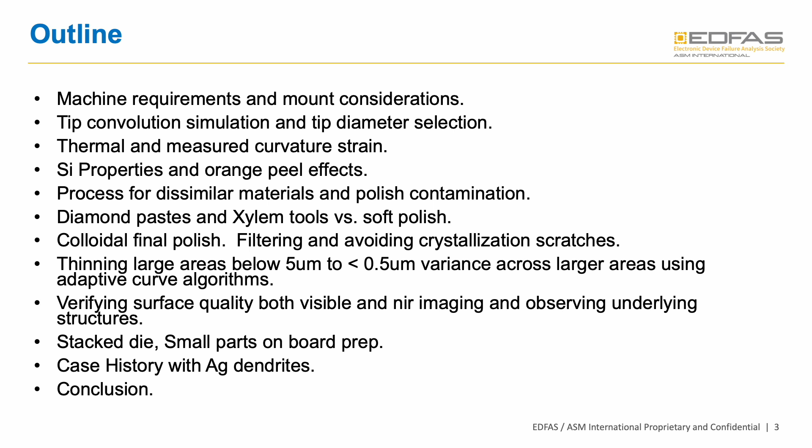So the first thing we're going to cover are machine requirements. We're going to overview the modules and the mounting methods. The first thing I want to talk about on the machine is how to fit large boards on.

There's an open design where you can place a rather large motherboard in the machine, and you just need to be aware of this Ymax value. This is 7.5 inches to the back mast of the machine. The device can be processed from beginning to end.

So you can have it on the board, you can do the thinning, you can do the inspection, you can do the polishing, all of that including the RST measurements without removing it. This allows us to get the submicron precision out of the machine.

The endpoints can be based on time, position, force, or capacitance and resistance functions, which we'll be going over in the next few slides.

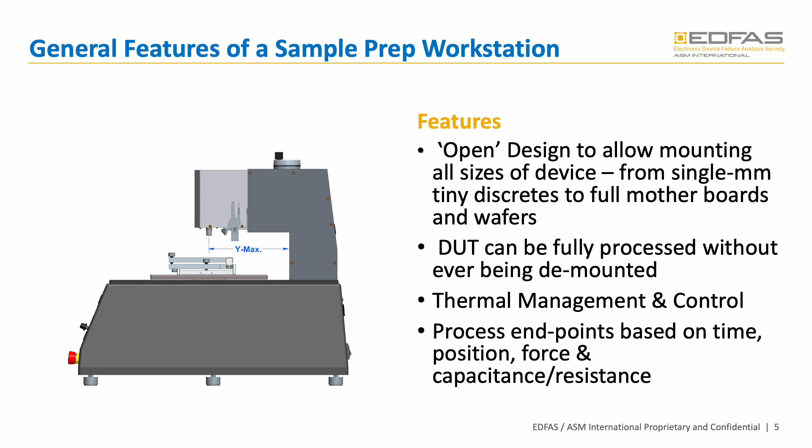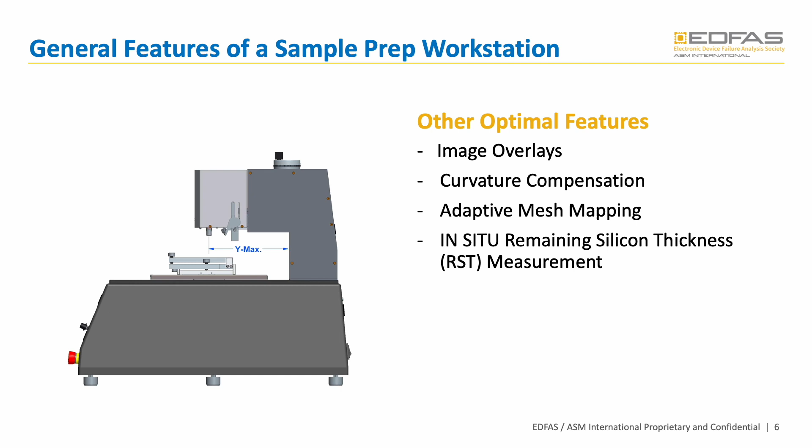Some other features: image overlays, curvature compensation, adaptive mesh mapping, and in situ remaining silicon thickness. As I mentioned earlier, by being able to leave the part on the machine, we can do the RST measurements. So by combining mapping and polishing, this is what makes the high resolution control possible.

So you start out with a curvature mapping model. This is an R-squared model where you're actually defining a curve and forcing that curve on the part. This is based on thinning the part, measuring the RST thickness variations from center to edge, and then matching a curve based on the tip diameter.

Once that curve's established or surface is established, then you add in the mesh map, and after you've added in the mesh map taken from the interferometer and you define that surface, then you use something called surf.

So what surf is doing, it's a surfacing control. It takes out the error in the force sensor so that you have a very deterministic Z head as the part is contouring the surface. So by combining these functions, we can get submicron accuracy out of the machine.

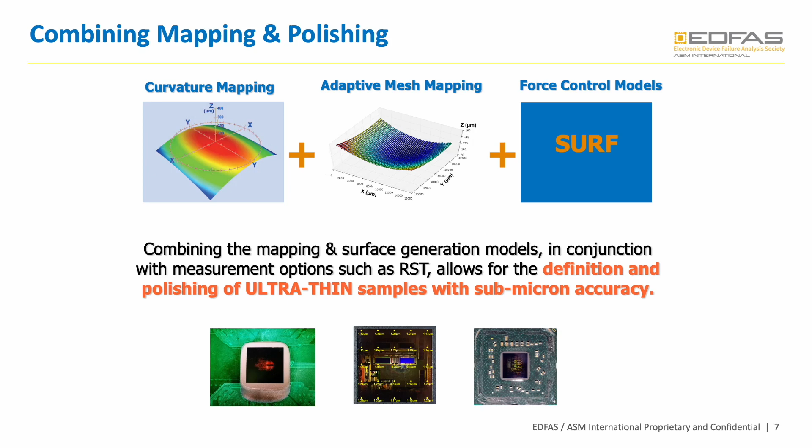There's also image overlays. This is if you want to target a particular area. You can load in diagrams, x-rays, or even an image of the same part or similar part that's been prepped previously to use as an overlay.

So the endpoint I alluded to earlier, the way this works is you have the tip biased with a 3.3 volt high impedance pulse, and then you have the lower plate which is tied to a high impedance amplifier. So we're sensing the pulse through conductive or semiconductive water.

Because the water is contaminated when you're thinning, it's automatically going to be slightly conductive. So as that water plate approaches the die, the capacitance increases, and then once it reaches any one of the bonds, which you can see over here on the right side, once it hits these bonds in this area, then you're going to get an endpoint response.

So you can set the machine to trip based on that endpoint response to make the process somewhat automatic.

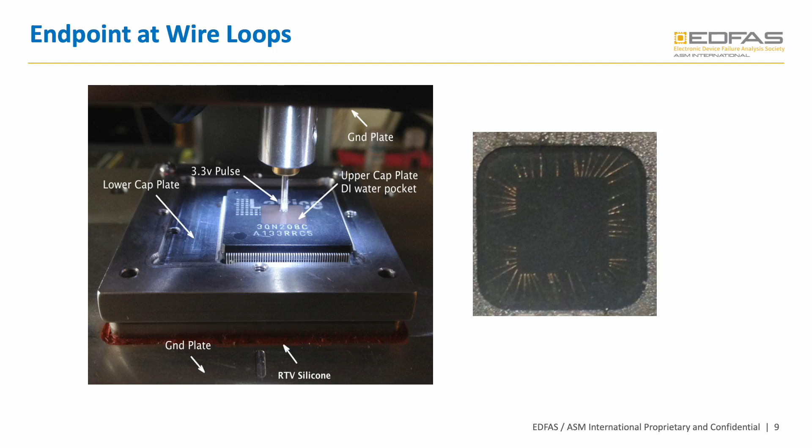So let's talk about mount considerations. It's very important to make sure that the sample's properly mounted. So when you place a sample here, you want to be sure that it's secure.

It could be nylon screws, it could be a hot melt wax, and you also want the part to be aligned so it's squared up to the machine.

What about boards? If you have very large motherboards, this board is so large, but the part we're going to be thinning is offset from the center, so it still meets the tolerance from the DUT stage to the back mast of the machine.

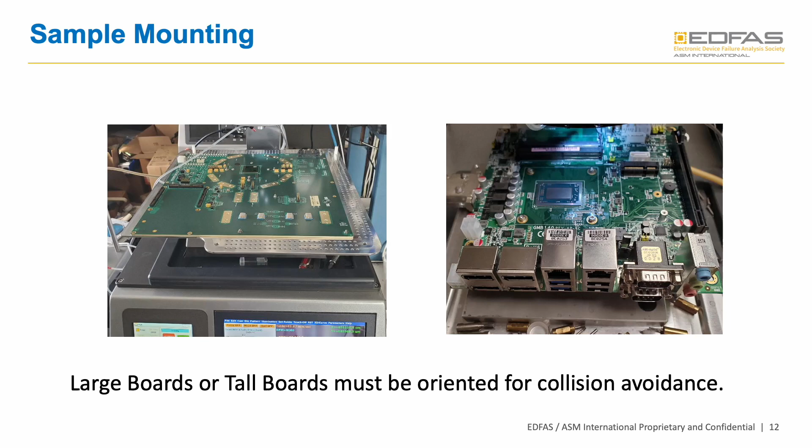With 2.5D and 3D die, you have to be concerned with, when you have multiple chips, are they all the same thickness? They typically vary by 5 to 10 micrometers in thickness, so be aware of that when thinning, as to which one is your target die and whether it will be thinner or thicker than the die you're not interested in.

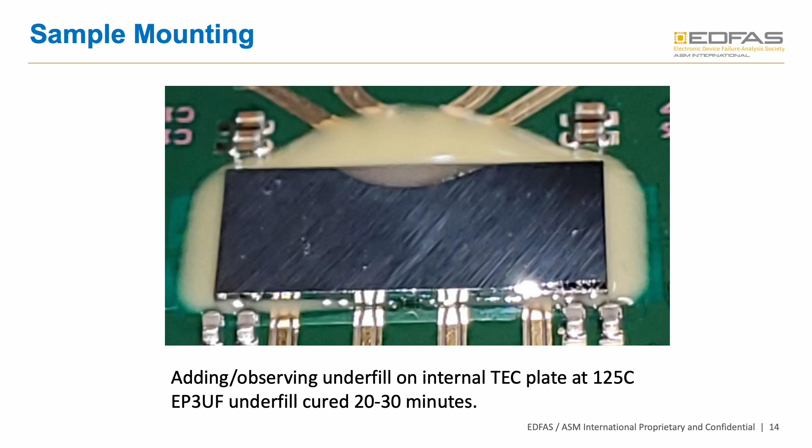What about underfill? In this case, the customer wanted me to thin this die, but there was no underfill. So I added underfill using the little internal thermoelectric plate on the machine, so I could observe the underfill creep underneath the die. I used an EP3UF underfill, which cured in about 20 to 30 minutes.

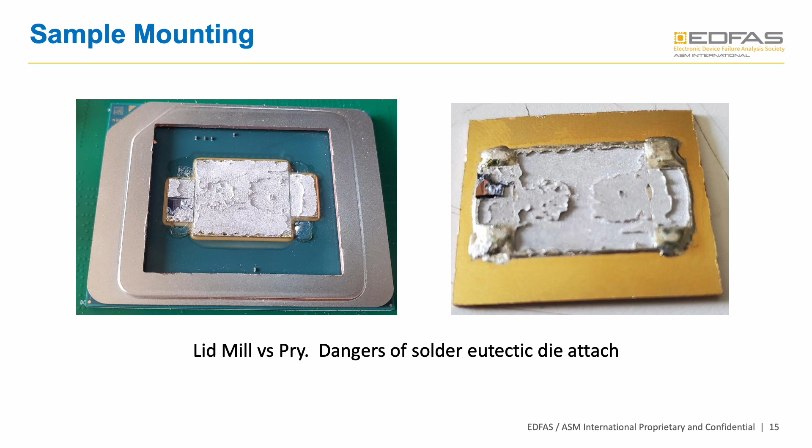Let's talk about tip convolution simulation and tip diameter selection. With tip convolution, the diameter of your tip versus the surface it's going to run on matters — the bigger the diameter of the tip, the more trouble it's going to have covering the surface properly, even if you're riding on this edge of the tip.

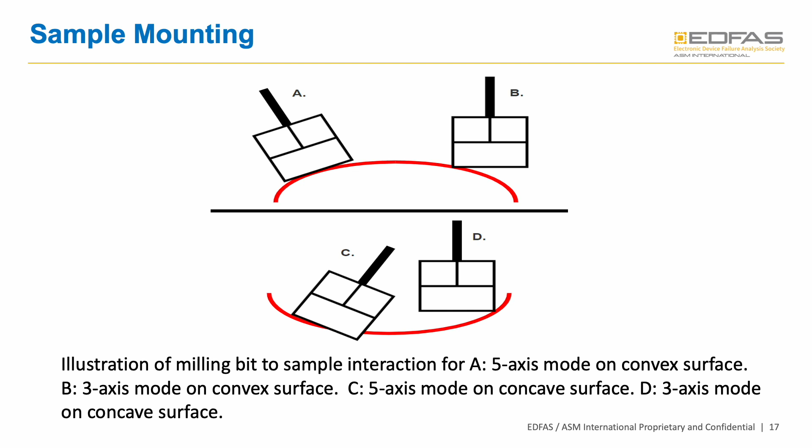By doing this, you can simulate and play with different tool diameters, and predict what your results are going to be before you remove any silicon.

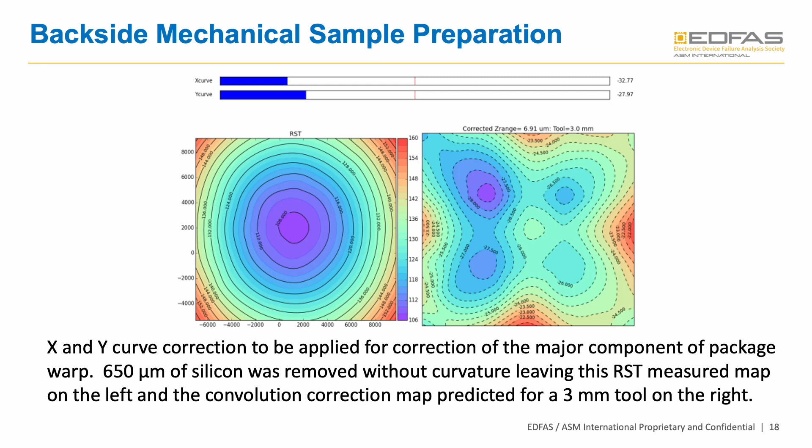Now, how about the change in curvature of the part? As you're thinning these down, while you're removing layers of silicon, the wafer curvature is actually changing — so this is a dynamic event. The best approach is to go ahead and do what I call flat topping the part.

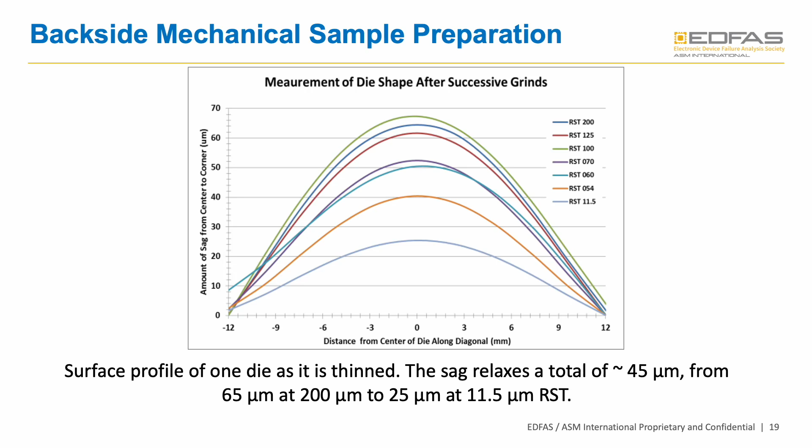You remove the silicon and don't worry about the curve, you just flat top it. Take it down to about 100 like that previous curve showed, or even 50 if you're going to go to 20 or 30 microns or less. So you thin it down, and that gets rid of most of this relaxation. Then from that point forward, you just do the curve plus mesh models and let the machine iteratively correct the smaller changes in the curvature of the part.

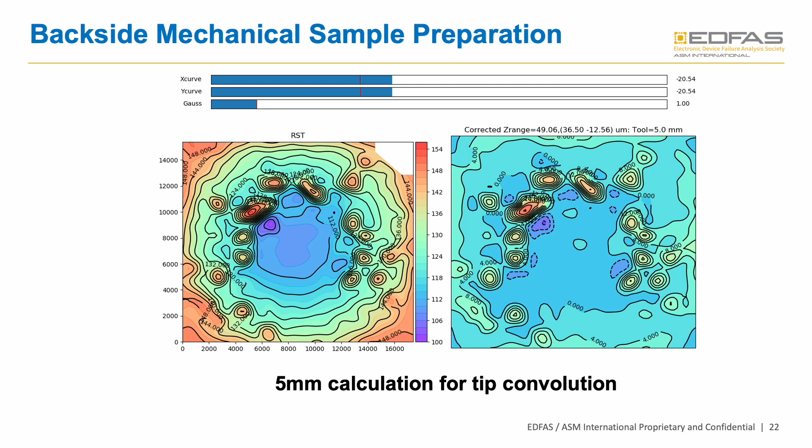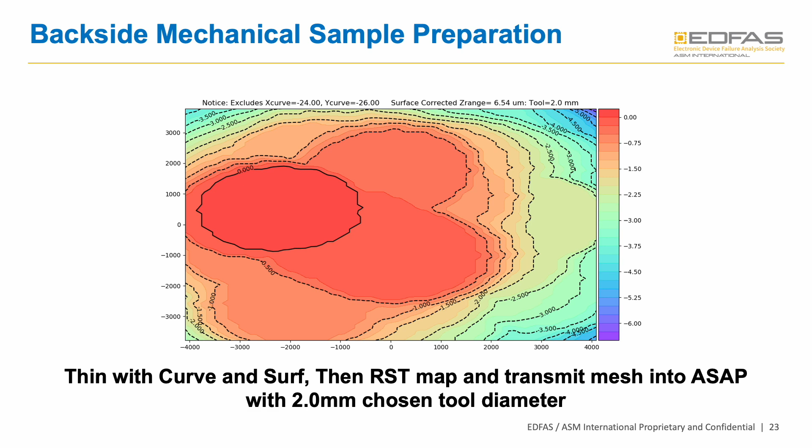Once that's established and you've removed a small amount of silicon to create that curved surface, you measure that surface and transmit that mesh model into the machine. Now you're taking the curve you've already created and adding this RST mesh model. With these two running together, you're greatly reducing the errors in the surface based on the irregularities of the part versus the theoretical curve you're trying to use.

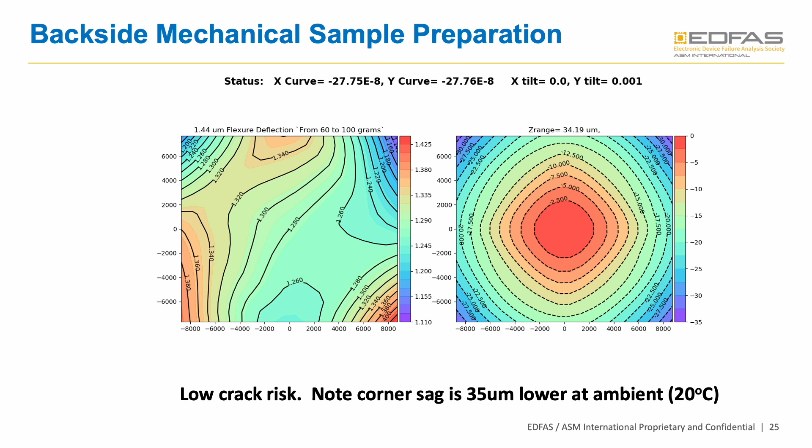Now if we heat this part up just to show how much it relaxes, you can see we're in the minus 27s, and the edges are about 35 microns deeper than the center. If we heat the same part and do another drop-down profile measurement on the machine, we find those edges are now only about 12 deeper than the center. So it's changed quite a bit from what it was previously.

And you see the X and Y curves are now minus 7s, minus 9s, so much less curvature. Remember that chart you saw earlier where as you thin it, the part relaxes and changes. So as you're heating and thinning this part down, once you get below, say, 100, the curvature is going to relax typically on the part enough that you no longer need thermal. So typically you want to do the thermal, thin the bulk of the material off, turn the thermal off, remove a small amount more material with an extra fine diamond tool, then do your RST mapping and go from there.

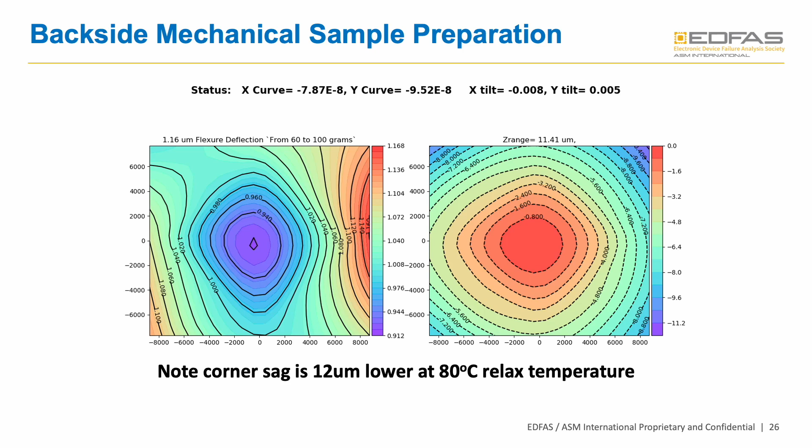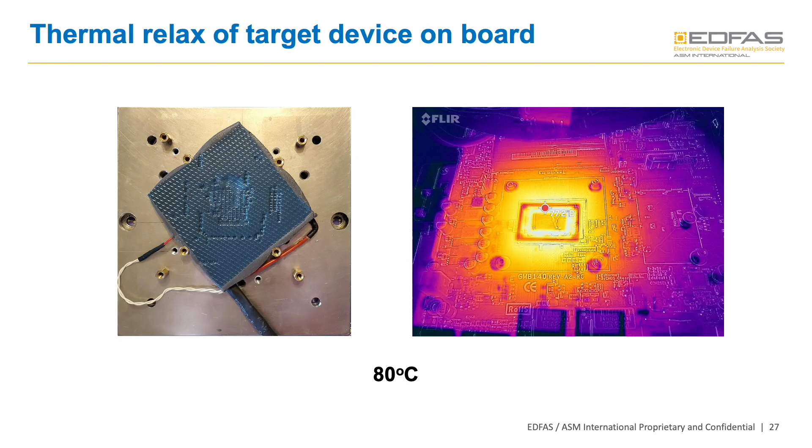So what about a large board? This is a Peltier placed underneath the board with a thermal pad material, and on the image on the right, this is an IR image of the actual heated part at 80 degrees C, showing we're getting the uniform temperature we want on the part for the thermal relax. Again, once this part has been globally thinned and we're below 100, we can turn the heat off and proceed normally from there.

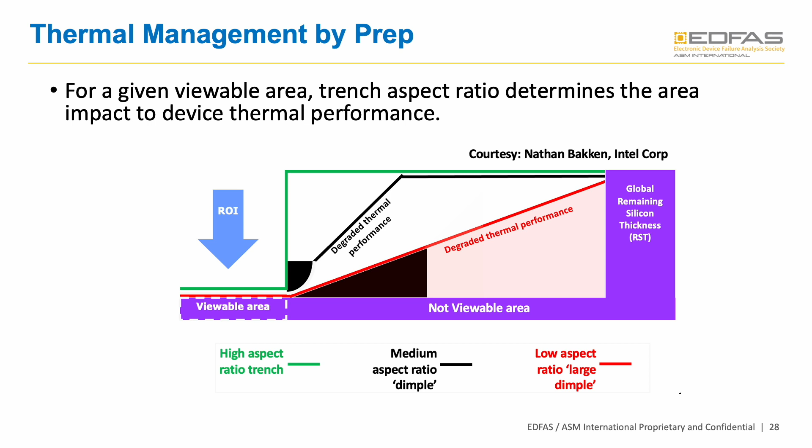Well, what about thermal management when it has to do with the part itself dissipating power? In that case, what you want to try to do is limit your viewable area where you must thin, and leave the silicon thick in the other areas where you've got a great deal of heat generation. Because once you thin the part, you no longer have any lateral ability to dissipate the heat.

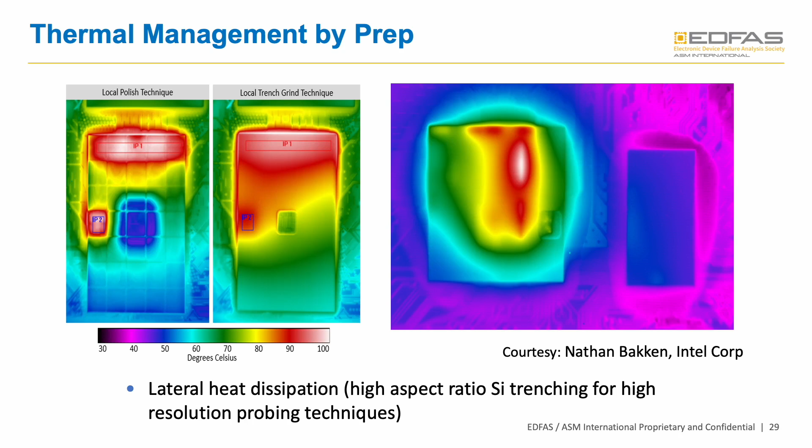So if we look at a local polishing technique versus this trenching technique, you can see this area is red to white, which is hotter, and it's a little bit cooler here. What you're trying to do is set this up where only the trench area is where you're going to actually be taking your measurements, leaving the silicon thicker in the other areas to do a better job of heat dissipation. So with power devices, this is something you've got to keep in mind.

Now what about the properties of silicon in terms of its translucency, and how it responds when you go ultra thin? Here we have the Lambert-Beer absorption law, where a light of intensity I0 incident on a piece of bulk silicon is attenuated based on the thickness of the silicon as a function of its wavelength and doping concentration.

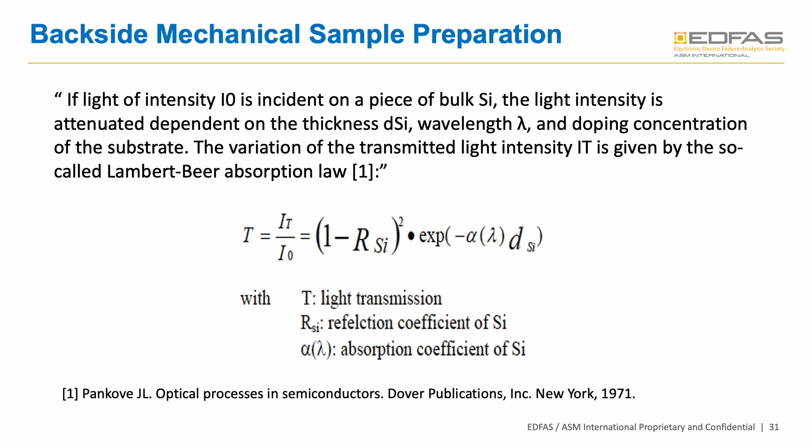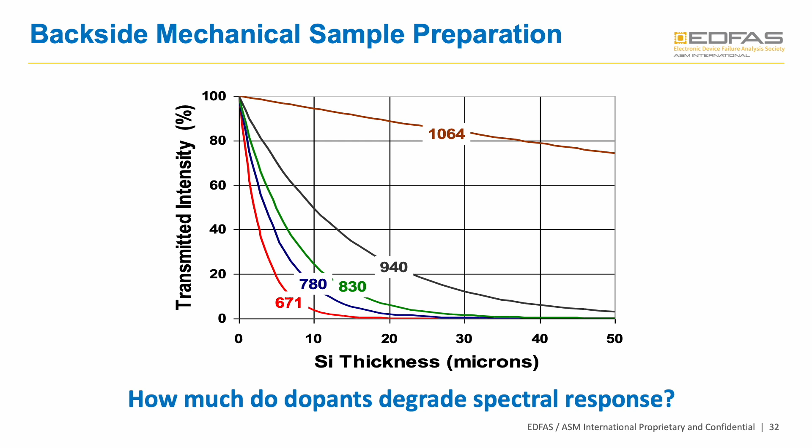So if we take a look at the next slide, this is how that affects a lightly to undoped piece of silicon. You can see the 1064 nanometers gets through fairly well. But as we head to the red wavelengths, the 671, we're now below 10 microns to even get through. So we really want to be at about 5 microns, 3 microns kind of thickness. And that's the interest in being able to do the visible SIL lenses, to get into the visible domain so that we can resolve smaller devices.

Now, what does doping do to this? If we look at the dopant concentration, you can see that your transmission falls off even at the band gap. We're looking at about maybe 8% with the heavily doped silicon, versus a lightly doped, which is going to be around 60% or so. As you go to longer wavelengths of IR, the dopant attenuates even more heavily the image you're going to get. So this is a challenge for the interferometer if you're looking through thick silicon, because the dopant concentrations are going to limit what you can pick up. So you'll have to thin some and then measure.

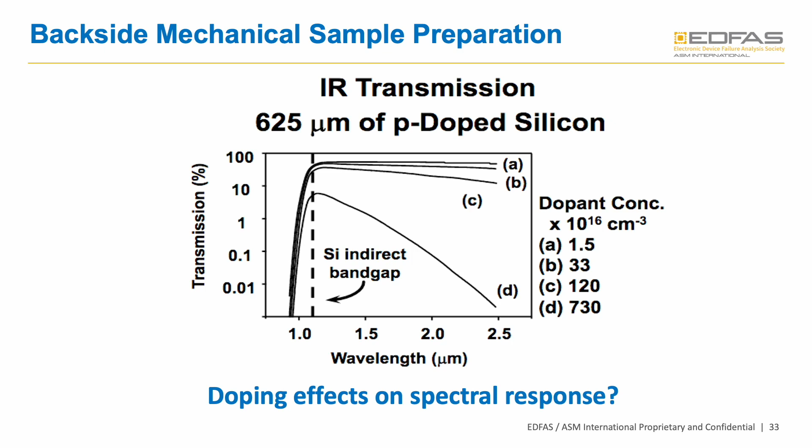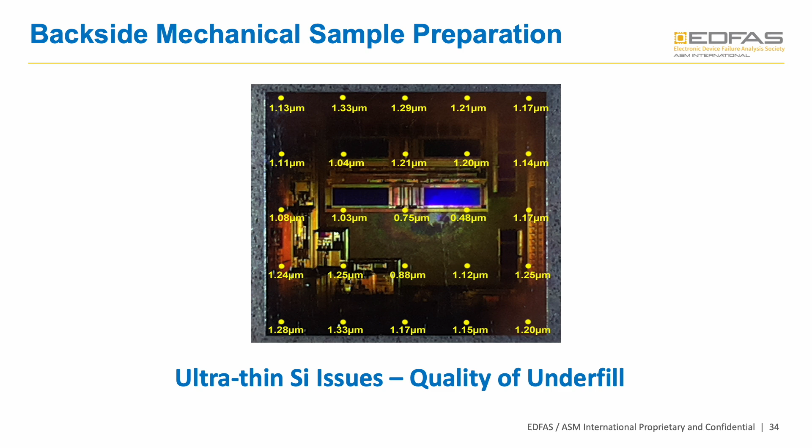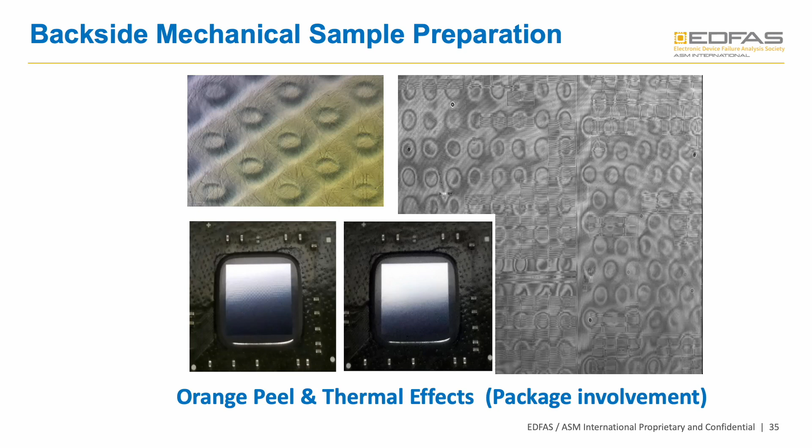With ultra-thin silicon, what are the issues? When you go really, really thin, it's not a matter of whether the machine will do it, it's a matter of whether the part can withstand it. The quality of your underfill, the type of strains on the part, all factor into this. If you look at this part that's been thinned down ultra thin, you can see on this side where all the bumps are, putting strain on the silicon. The silicon acts like saran wrap, and in a laser interference mapping you can see the irregularities of the fringe patterns, the moire patterns around each of these bumps. If you cool the part down, you'll see the bumps appear. If you take the part to the temperature at which you prepped it, you'll see the bumps disappear. Obviously you wouldn't want to reflow a part when it's this thin—it's unlikely that it would survive.

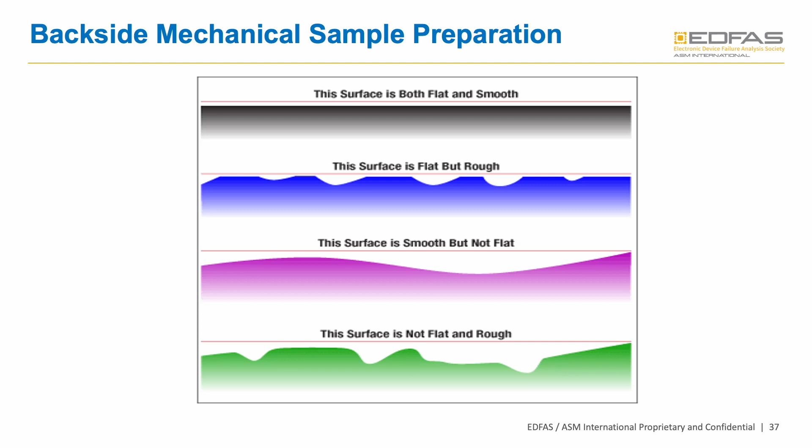So what about dissimilar materials and polish contamination? When we're prepping a sample, these are a few examples of how to understand a surface. Here's flat and smooth. Here's flat but rough. Then you can have smooth but not flat, or not flat and rough. Typically you're going to be seeing the top surfaces, so flat and smooth, or flat and rough until you get to flat and smooth. If you over polish the part, you'll end up with the third circumstance, smooth but not flat. With pits or defects on the part, you can get multiple peaks coming off the interferometer, so be aware of that—you'll occasionally get outlier data points.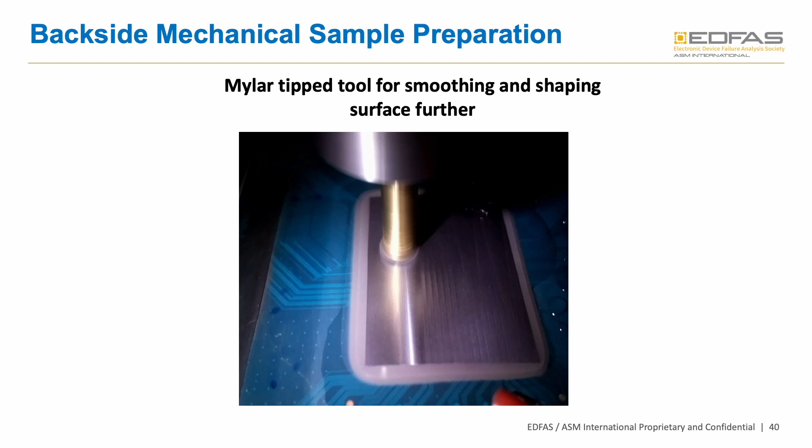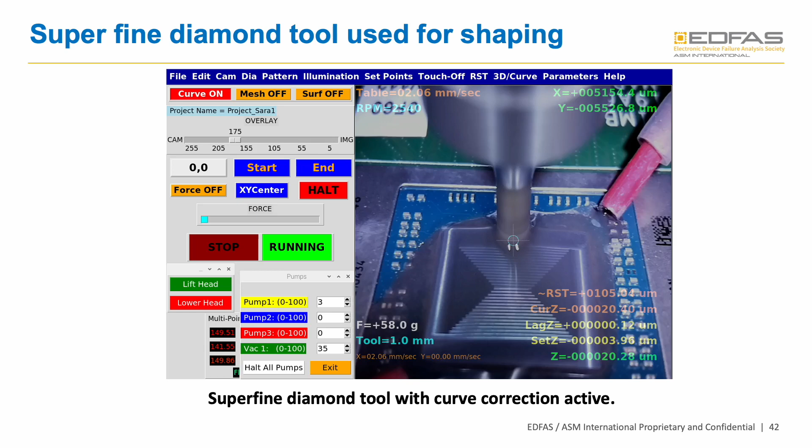Now let's talk about forming the surface. Once we've thinned the worst of the silicon off, we turn the curve on based on those set curve parameters. We run a spiral pattern and define this surface. Once this surface is close to defined, we turn this surf function on. Then the part, once the forces settle out with the force map—which I'll show in a subsequent slide—we're ready to go ahead and measure the surface. We take an RST map of that surface, feed it into the machine, and then switch over to the diamond paste with the Xylem tool.

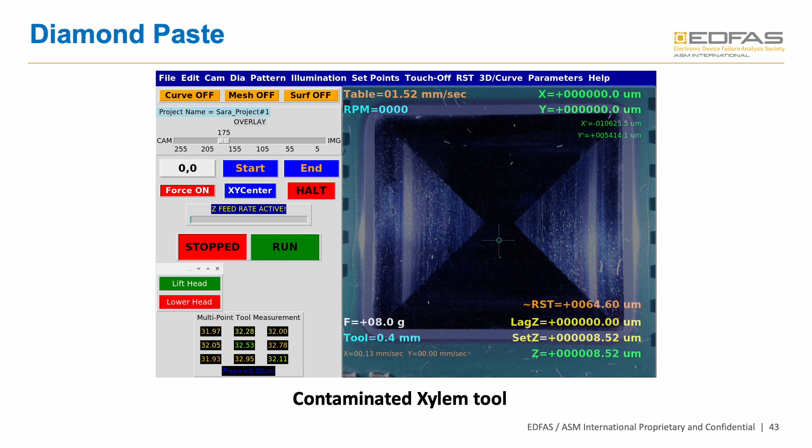You can see in this image that there's some contamination that generated some streaks at this point based on the angle of the tool. What happened was some of the glass particles were picked up out of this underfill, and they got caught in the tip, so as the tip got to this particular angle, it started to generate these streaks. This means we need to clean up or redress the tip. You redress it with a razor blade—do it on end to dig a little cup in the bottom, then just flat mill or flat grind it with the razor blade with the spindle running. Then you're ready to proceed with the same tip. Second option is throw the tip away and put another tip in.

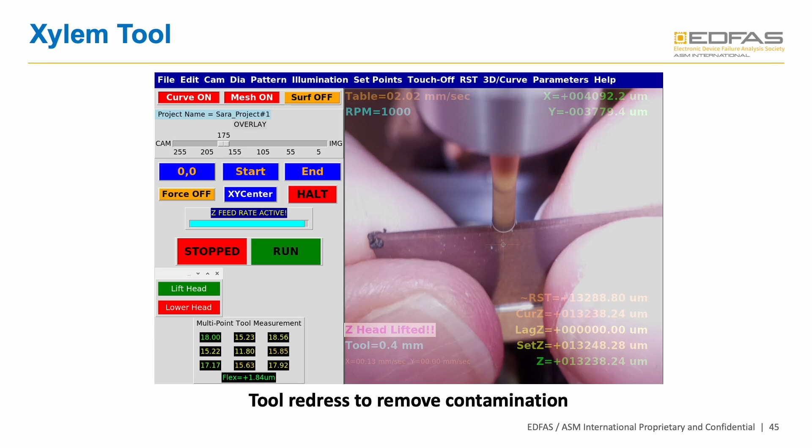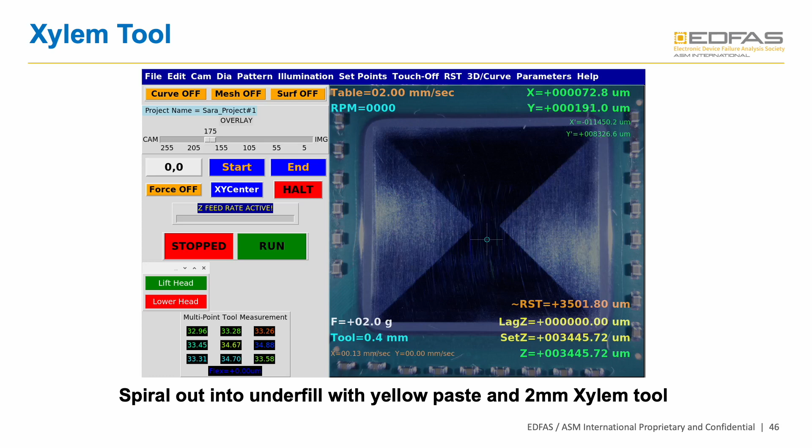Now you can notice these little terrace marks, looks like an X or an hourglass running along here. That's perfectly normal, a very subtle optical effect. As we go into the polishing steps, that'll completely disappear. You won't be able to see it.

Once you enter these polishing steps, that's where you get rid of those subtleties on the device. So this is a soft polish using a cotton bud, using the green paste, which is an even finer diamond grade paste for achieving the polish on the part.

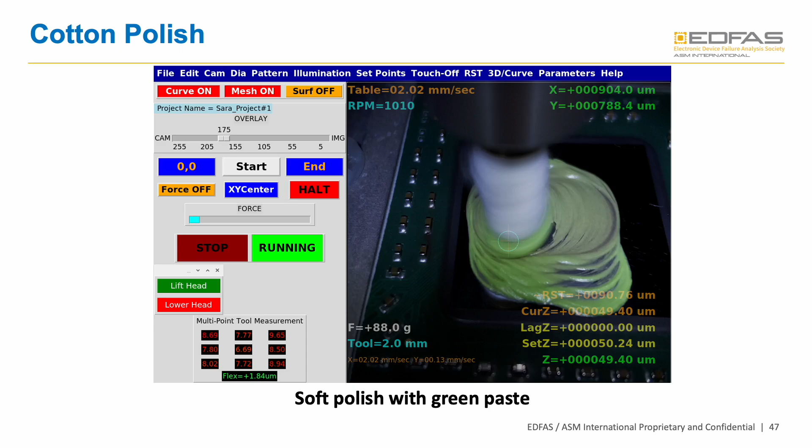So now that we've done that large area, we want to thin a smaller region of that large area below 5 microns with about half a micron variance or better. So we're going to use the adaptive curve algorithms to do this.

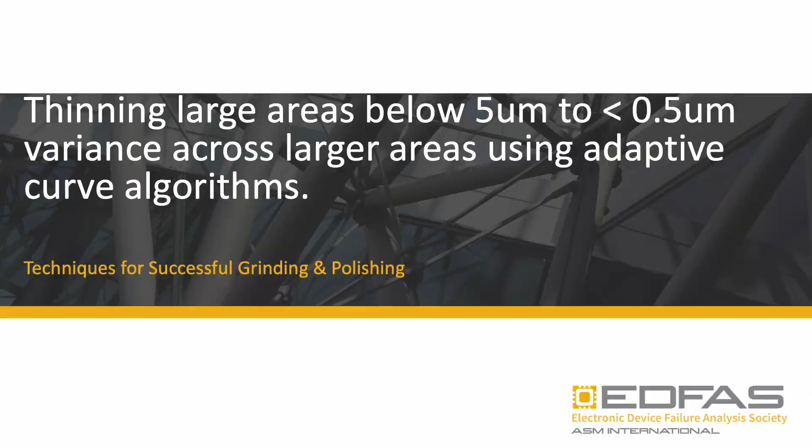The first thing we do is correct over this particular area that we're going to do the thinning. We treat this as a new part. We do the automated drop down tilt measurements. With this area defined, we go ahead and grind a little bit of material off.

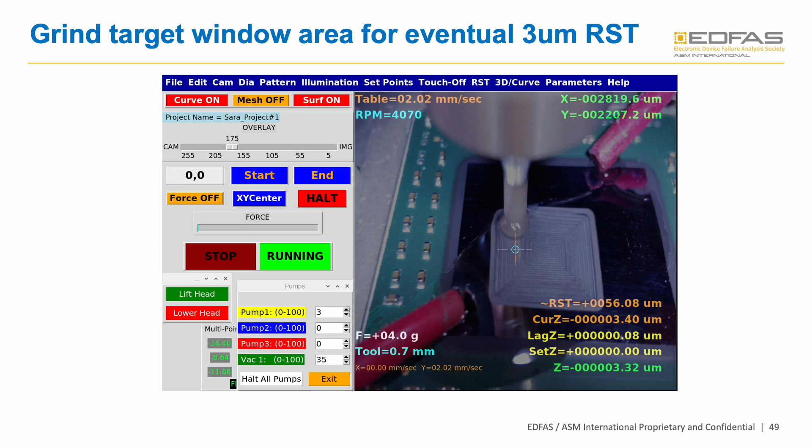And then we proceed the same way as we did before, where we're adding the mesh maps and the curves into this. And then once we've done that, we switch over to the diamond paste, and we use this feed mechanism where we're slowly feeding the tool, because the tool is wearing.

So the paste is wearing the part, but it's also wearing the tool. So by using a slow feed, we compensate for the wear of the tool with the surf turned on, the mesh turned on, and the curve turned on.

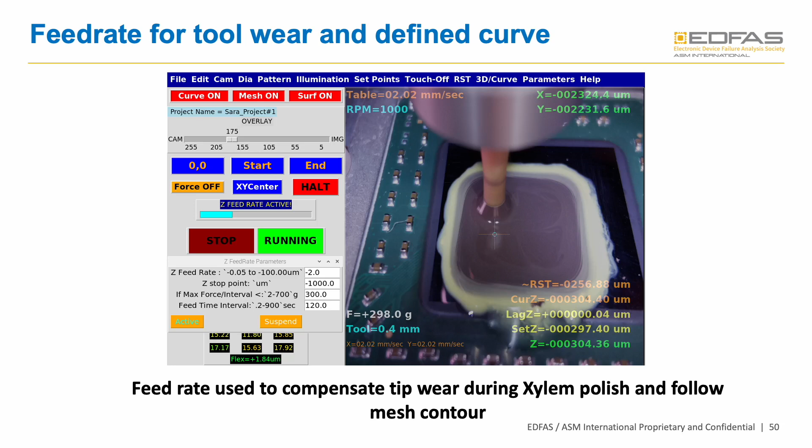And the only thing we don't know is how much material we've removed. We have to judge that by time. But we do know that we're generating a flat surface. And how we know this is based on the force map.

So this is now a good time to stop and then do another RST map. We load the new RST map into the current map, and it puts a little more down pressure on these areas that weren't cleaning up. So it's adaptive, as I've mentioned.

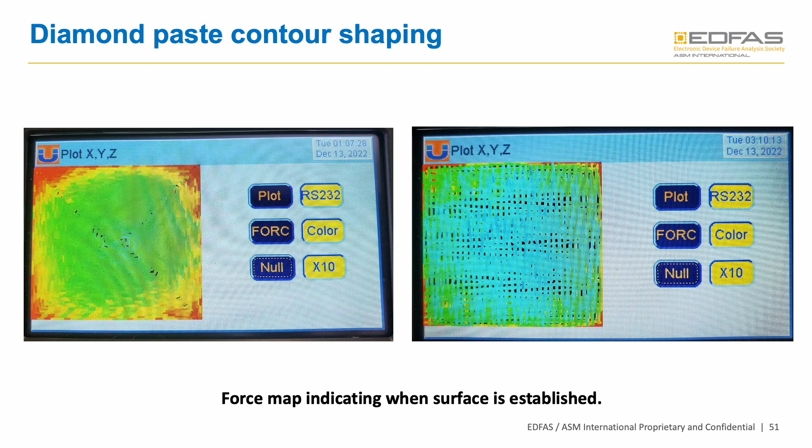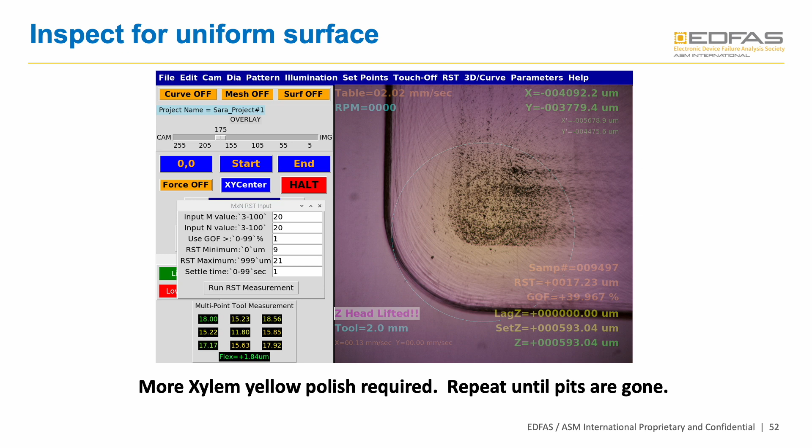So resume with the yellow polish, run another set. Once this is all uniform, then you know that you can proceed to the next finer polishing step from where this one is. Then we go to the colloidal polish.

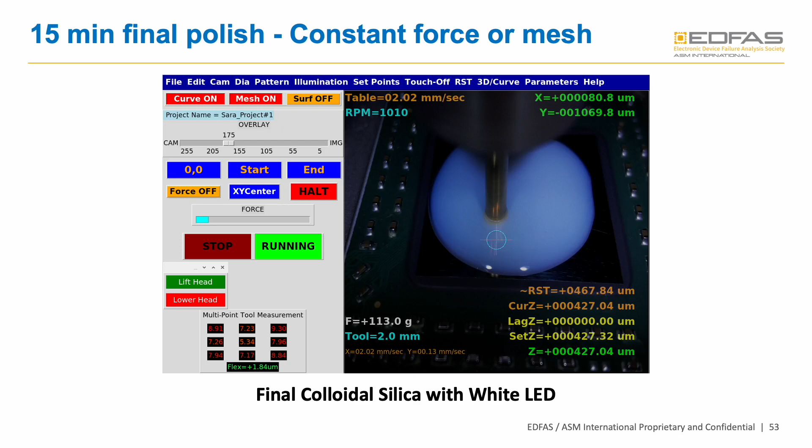So this is a colloidal silica that's being polished. You can't see through it with visible light. If you go to infrared, you can actually see the circuitry glowing from underneath in a few areas here as this is thinning.

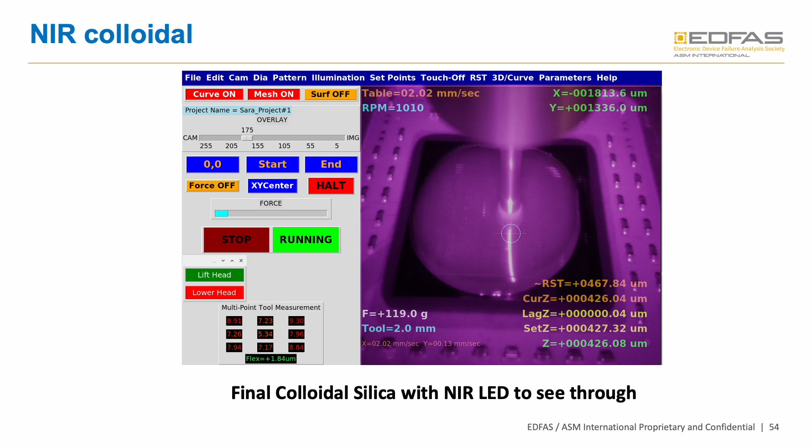This can be useful because as the colloidal silica starts to get filled with regular silicon particles, this will become less transparent in the near IR. So you know that your colloidal is starting to get too contaminated, and it's a good place to stop. I typically just use the 15-minute rule when I do this.

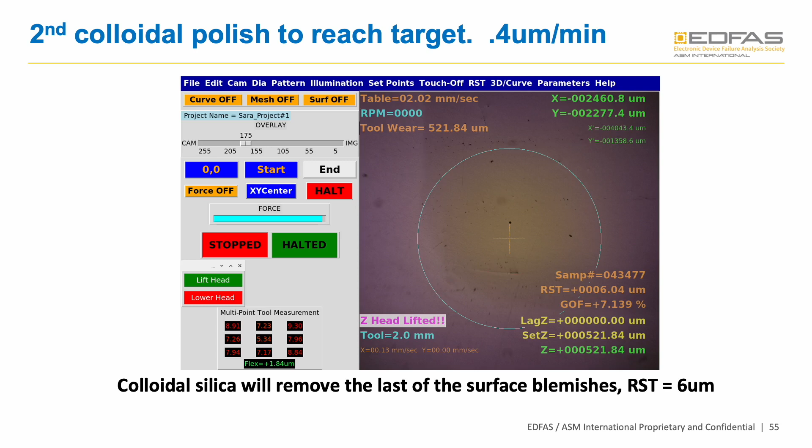So now we're at 6 microns, and you can see right here there's a little bit of a scratch or a score. So we'll go a little bit longer. And now we're at 4.76 microns, and you can see that scored area is now gone.

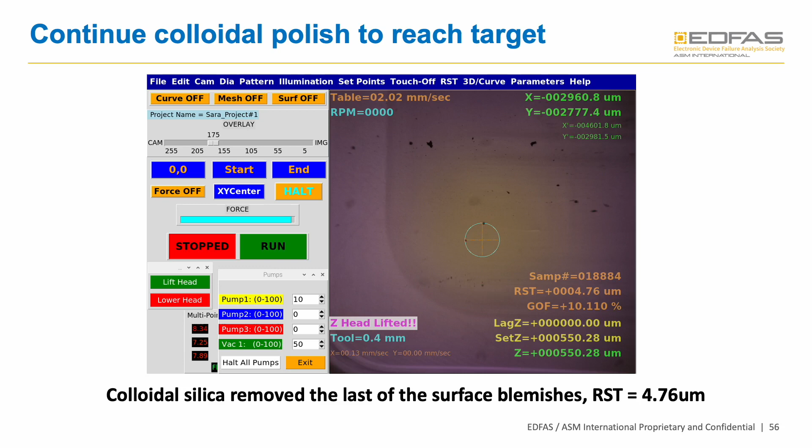Our goal is to reach about 3 to 3.5. So we just continue polishing with the colloidal, and now we're at 3.5. So you can see in this mesh model, 2.8.

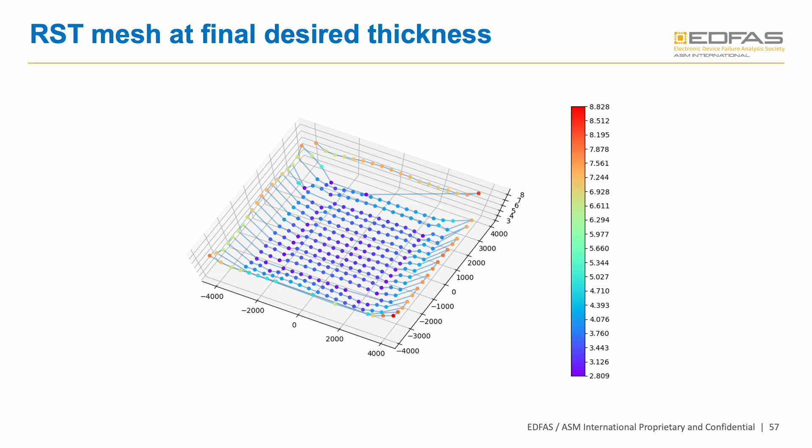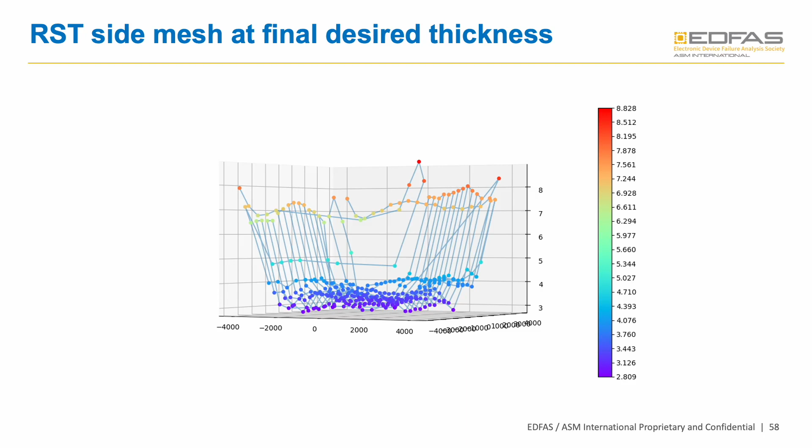And then these edges out here, this is where the area lips up, and it can't read on the visible interferometer. So we're limited to about 9 or 10 microns maximum for the visible interferometer. You can roll this on its side and get a cross-sectional view of how the floor of your part looks. And then this is the exact same data represented in a contour mesh.

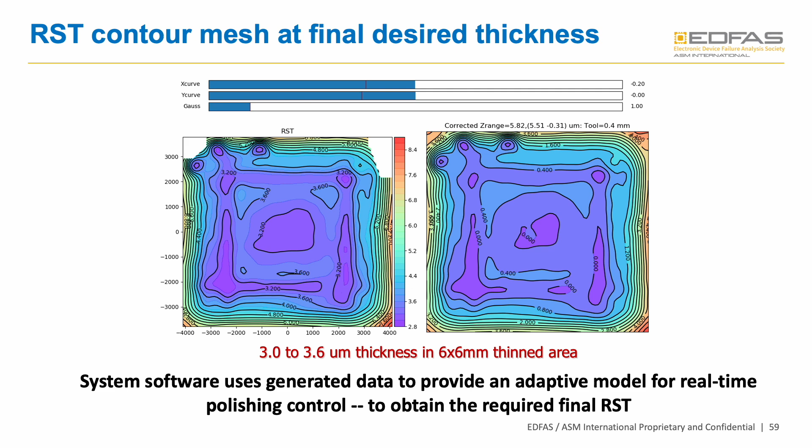These white areas in the corners are because the visible interferometer couldn't read these thick areas, so the software guessed on what those corners are. But the takeaway point is you can look at the corrected Z range here. If 0 is in the center, you can see we're varying from 0 to 0.4, and finally as you move close to the edges, about 0.8 or 1.2. So this contour map shows you've got a nice, decent surface here to continue the analysis.

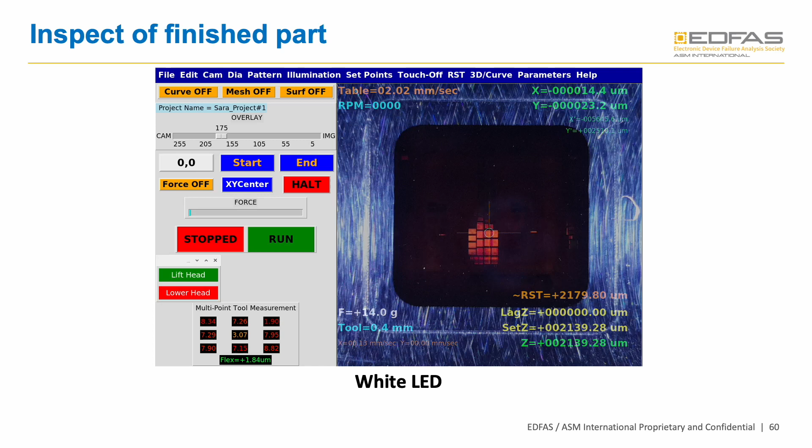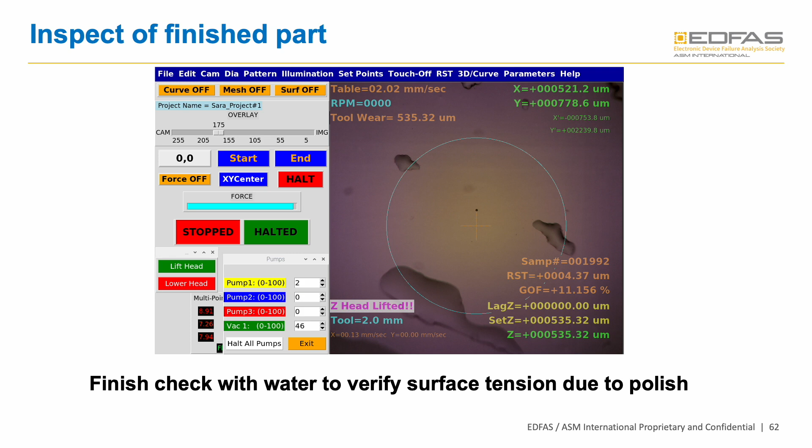A few other things to talk about: stacked die, small parts on board.

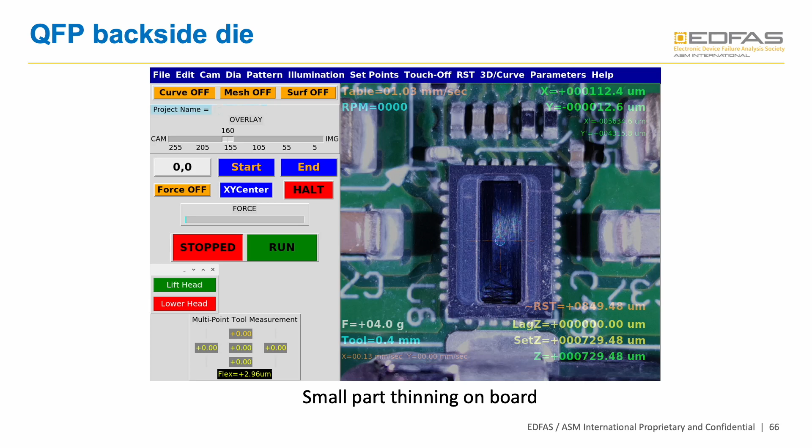This is an example of small devices such as QFPs and SOT23s on a small board. This one has been thinned, and you can see the shadow of a capacitor right here. This capacitor is annoyingly close to the edge of the die, so this one required an X-ray overlay in order to make sure I properly targeted this die.

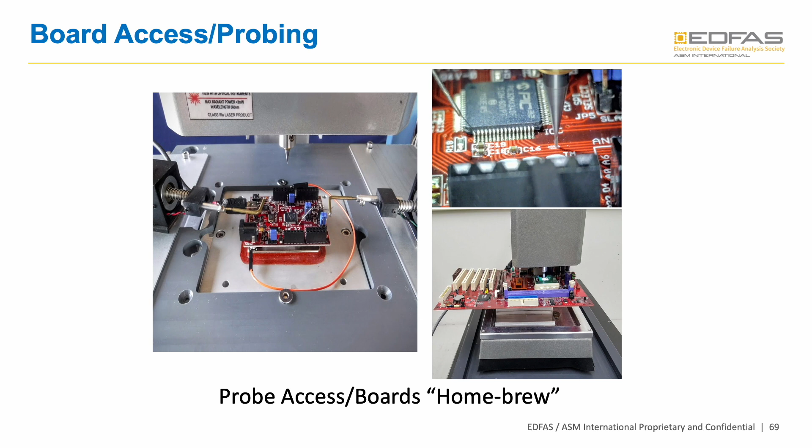This is a few kind of off the beaten path things you can do. In this case, you have a homebrew arrangement where you've got a board you can attach with some probes and probe some pins on a part while coming down with a milling tip, milling and picking up access on a board. So we've got a lead dropped here, and we're using the milling tip as the other side of the probe. Then you can measure continuity of traces or cut traces to verify they're open. You can also put motherboards on here to be able to thin as well, as I've already shown.

We're almost done. This case history is with silver dendrites. This was a part where whenever you opened it, the leakage would go away. So I used the machine where I very gently approached this capacitor from the side where the arrow is. I had the leads hooked up to a curve tracer so I could watch the parametric instabilities as I was thinning. Once I got extraordinarily close, there was just a little bit of this plastic left along the edge, which you can see right here.

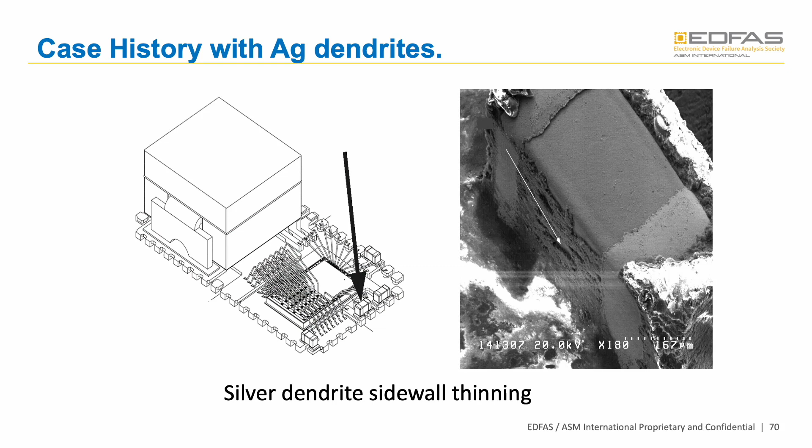Then we went into the SEM and looked at these areas where there were open pockets, and found silver dendrites.

For more reading, as far as ultra-thin chips are concerned, or to learn more about the pitfalls and benefits of flexible electronics, this is a good reference source. In the Microelectronics Failure Analysis Desk Reference, these are the two papers I have in there, and there are a number of other good papers dealing with solid immersion lenses, front side prep and front side analysis, delayering, etc. So there are quite a few good resources there.